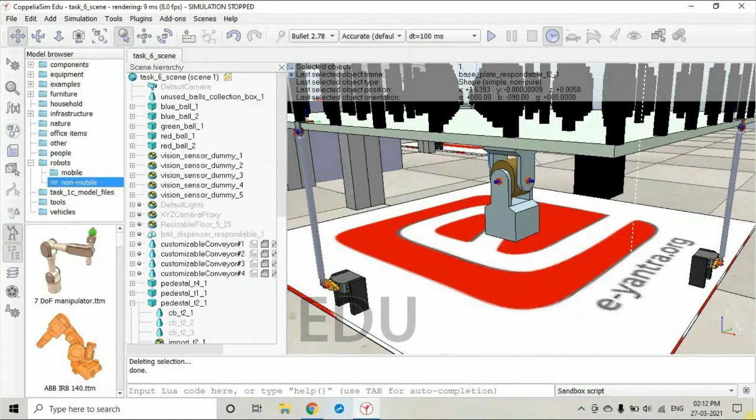The positioning of the servos at the adjacent sides along with the support which is provided at the center is enough to make a simple ball balancing platform. And we got this idea from a YouTube video named Acro Ball Balancing Table.

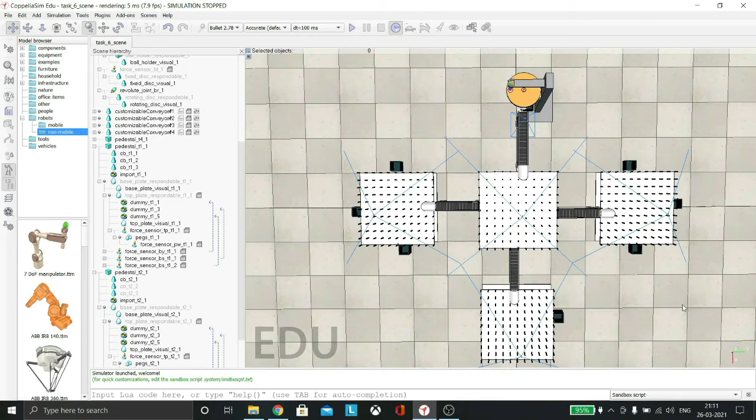The algorithm sends signals to each fin that tell them to rotate in a certain way. The connections from each fin all the way up to the top plate ensure that the platform inclines in the way it's intended to. The servo fins have opposite orientations to each other. This was done to make the code structure more aesthetically pleasing. Our code is generic enough to support each and every table, the only changes being the table serial numbers like T1 and T2.

In order to make the support at the center, we used two yokes along with a universal joint that were connected by using two revolute joints. We have two servo motors, so it requires 4 servo holders to hold the servos, 2 servo holders for each motor. The shaft of the servo motor is connected with the servo fin. The servo fin is then attached with the connecting rod. The other end of the connecting rod is connected with the L connector.

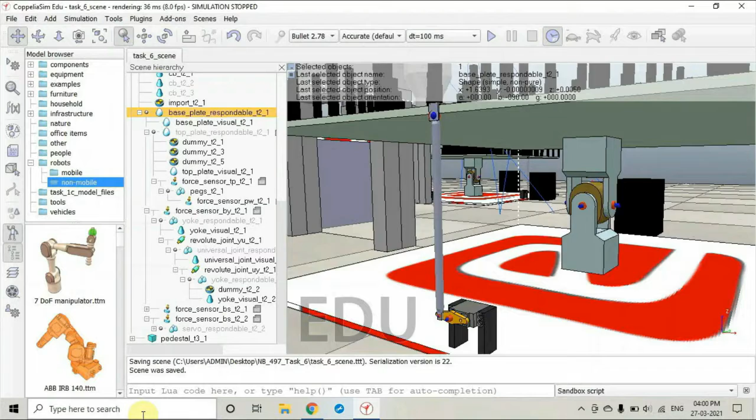The L connector and the connecting rod are joined by a spherical joint, and the joint between the servo motor and the servo fin and between the connecting rod and the servo fin is revolute. A similar connection is made to the other servo also. Thus we completed our ball balancing platform. In total we have used 2 servo motors, 4 servo holders, 2 connecting rods, 2 servo fins, 2 L connectors, a base plate, a top plate, 2 yokes, and a universal joint.

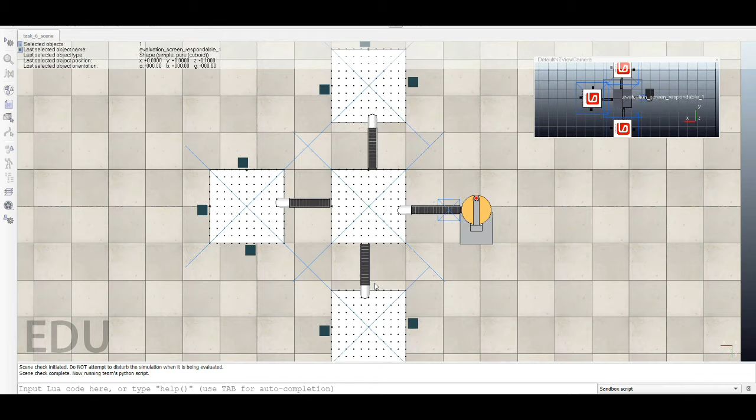So, we are about to start our evaluation for the final theme run. Now, the grader application takes control over the simulation. We can see that all the mazes have been successfully decoded and generated. Now, as the simulation has started, we have the blue ball arriving first. This ball will be navigated to the collection box 1 of table 2.

Now, the first ball has been transferred to table 2, where it will be navigated to the collection box 1. We use the A-star algorithm for path planning, which uses a heuristic to find the shortest path, which also takes care of the direction. Now we can see the second blue ball is about to arrive at table 4.

Now we can see that our first ball has collided just when the second ball arrived. This is possibly because we switched our algorithm to a concurrent process so as to support the traversal of the ball on both the tables. During this process, we decrease the differential gain slightly so as to counteract the time delay that occurs in order to execute both the processes concurrently. Tuning the gains in order to support two balls was something that we couldn't achieve with great accuracy.

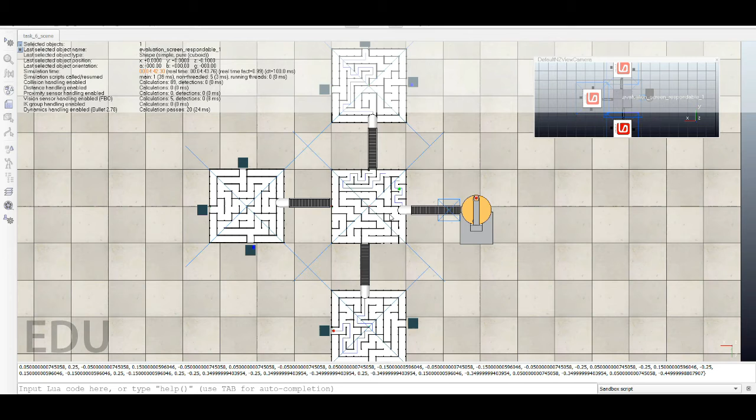Now, the fourth ball, which is green in color, will be navigating to collection box 2 of table 3 via the main table. When a ball leaves the primary table and enters a secondary table, the code simultaneously checks the vision sensor input at the initial conveyor belt for any new balls. If it detects a new ball, the code assumes a special case in which it deals with two balls in different platforms in a concurrent manner.

Now we have the last ball, which is red in color, and it will be navigating to the collection box 1 of table 1. Another interesting feature that we have introduced is a ball retraction mechanism.

By this, we mean that if the table is subjected to some external disturbances or a faulty image frame which causes a ball to drift from its current set point, the ball retraction mechanism retracts the ball to the previous set point from where it can continue the rest of the path navigation.